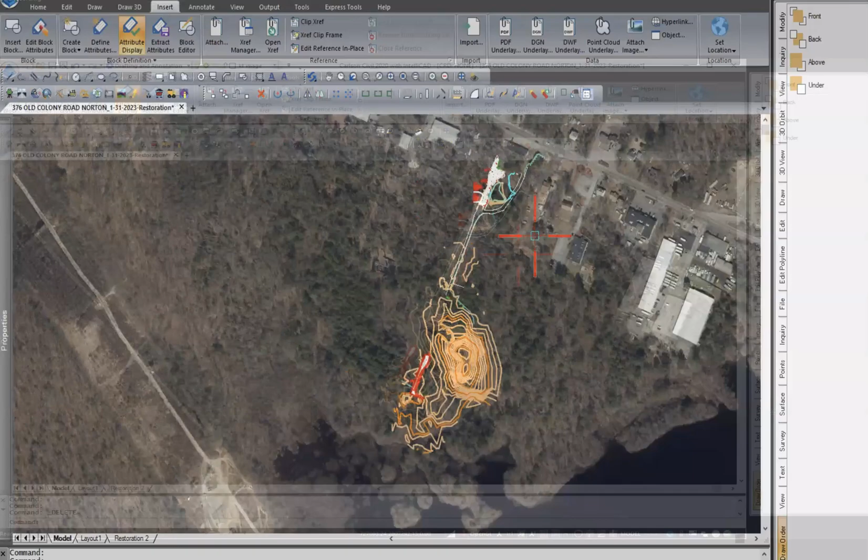Good evening, my name's Ken Thompson. John, can I share the screen? You have screen sharing capabilities, Ken. Can you see the AutoCAD drawing? Not quite yet, it's coming. There you go, okay, it came up.

This is a long linear property that extends from Old Colony Road down to the lake. I'm sorry I don't see my property boundaries up right at the moment, but as part of the enforcement order, which was over 8,000, I'm finding it more like 9,400. There are two major areas of impact up behind the buildings and in the back here as part of the road construction.

I want to zoom in here. We went in and did some soil augers and test pits up in the upper half of it. In the middle of the project, I'm finding 3 feet of muck with 18 to 24 inches of fill on top. It's a good gravel fill.

What we're recommending is to come in from this backside here. If we need to build a road on top of what's already there just to support the equipment, we will, but to remove all this material we're going to truck it off site. We decided to truck it off site and then restore the area by exposing existing muck that's available, then regrading it—hummock and hollows, pit and mound—and then replanting it. I have a planting plan here.

That depicts what you see here, a combination of 4 different trees and shrubs. It's based on Army Corps standards. The trees are set at 10 foot on center, and the shrubs are spread among them.

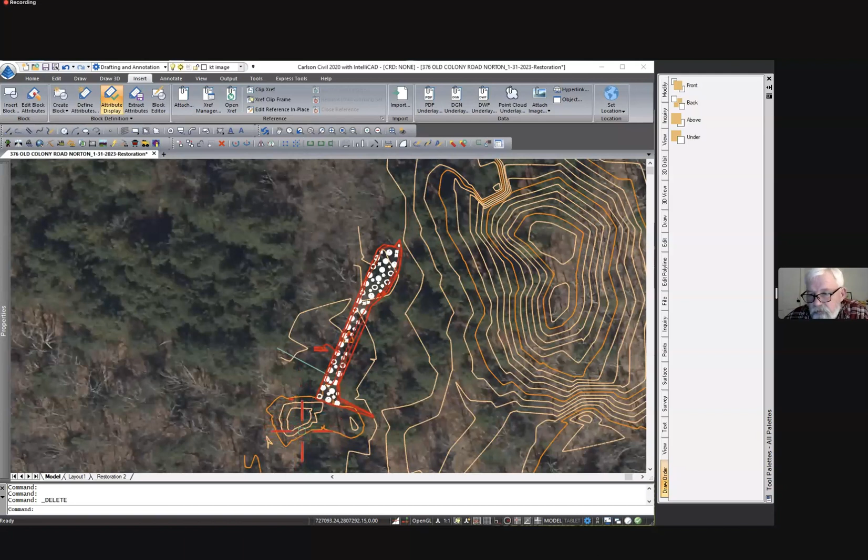Now the rear portion of the property, it's more of a hard case road here. We'll remove that road and backfill it with a compost loam mixture. I'm going to block it from draining into this hole down at the bottom—it was an over-excavated hole, which is now wetlands. The wetlands extend across the road in several areas here. Because I have this image on, you can't see the roadway, but it's basically right here.

Same plan: put the soil back in, and then plant it Army Corps style. There's going to be 2,200 linear feet of silt fence to protect the road and everything.

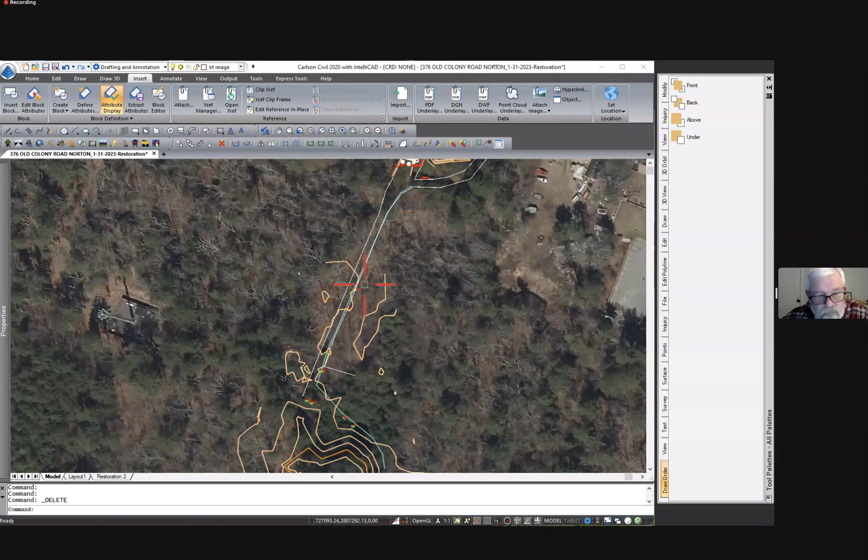To gain access to the rear of the property, there's a culvert right in this section here, up behind the buildings, and then a wet spot back here. So we'll put metal plates over it to get the dump truck over it, and then timber mats in this area. That's for the enforcement order. Are there any questions I can entertain?

And just to John Thomas, I'm assuming this addresses all the components of the violation out there, which dates quite a few years ago, I believe. Yeah, I think this was a lingering enforcement order since the late 80s, early 90s.

Looking at this site, you can tell the gravel road isn't paved, and it had some sort of historic fill there. In order to bring this site into compliance, what's being shown identifies the major areas, mostly associated with the roadway. Based on this, it looks like it would meet or even go beyond the removal and replacement mitigation of what was historically done.

And I'm assuming this has to do with an interest in selling the property? So the property's been purchased by United Excavation and Paving. A family operation - this would be the home of the excavator, not the paving company, another member. So they'd like to utilize it long term, coming back in with a notice of intent to account for the culvert crossing and this little fill down here, which at this point is just a rutted road.

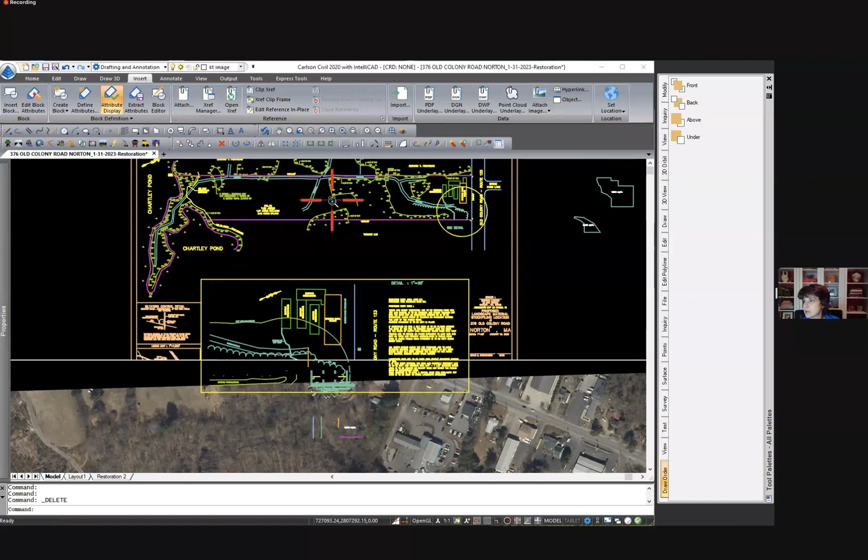That's the wet zone, and there are hummocks and hollows out here, so I'm going to try to incorporate that. It depends on what I get - once I get the stuff off, do I have a big puddle or do I have some material to work with, fluff it up and work with?

Okay, so as part of the sequencing on this plan set, I would ask that it's very clear that they contact you to oversee this work. Well, I can guarantee I'll be there. Okay, yeah, I just want it on the plan. Yeah, that's fine, I understand.

And then, so it doesn't look like - these areas have obviously been filled, so there's no tree clearing required. Is there even for access?

No, it's mainly Russian olive right now and multiflora rose growing through the center section here. There's one area we're going to leave the fill in place, right across here. This is an open water area that John and I think is a vernal pool, and it has saplings growing out of it that we want to keep for shading purposes.

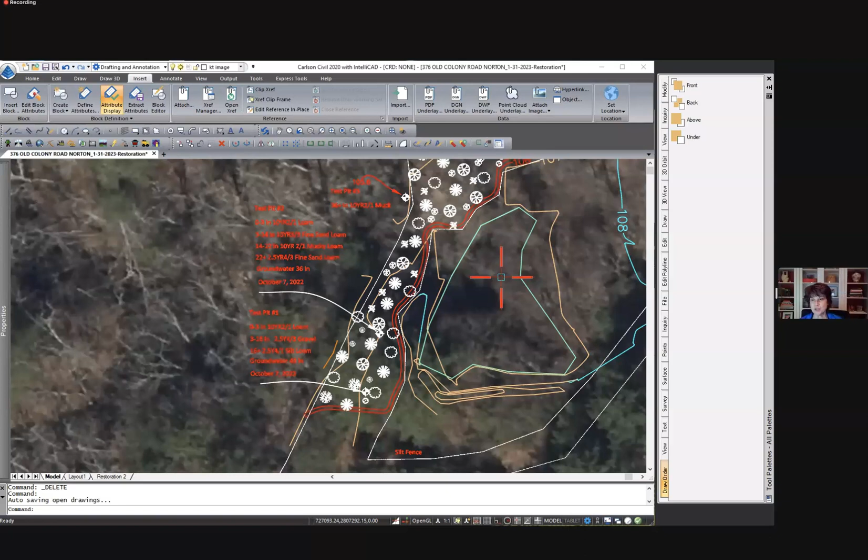Okay, it sounds like you have a really good plan, you just need to articulate it. It's in your head, you just need to articulate it onto the plan, that's all. We'll get it done for you.

Dan, you had a question? Yes, may I make a comment? Is the multiflora rose to remain? Because that's invasive. I should come clean because it's been growing on my property too, and I have to get rid of it again this spring. It smells nice and looks nice, but it is an aggressive invasive plant, as you probably know.

So we would hope that you would get rid of it. We're gonna get rid of it. And you can borrow my tree wrench in the spring. How's that sound? Okay, that sounds good.

I use a scythe, but okay, that sounds good. Tree wrench, you get the roots. Oh, well, they sell them at Home Depot. No, I had to order it online, but you can borrow mine. It's too much money.

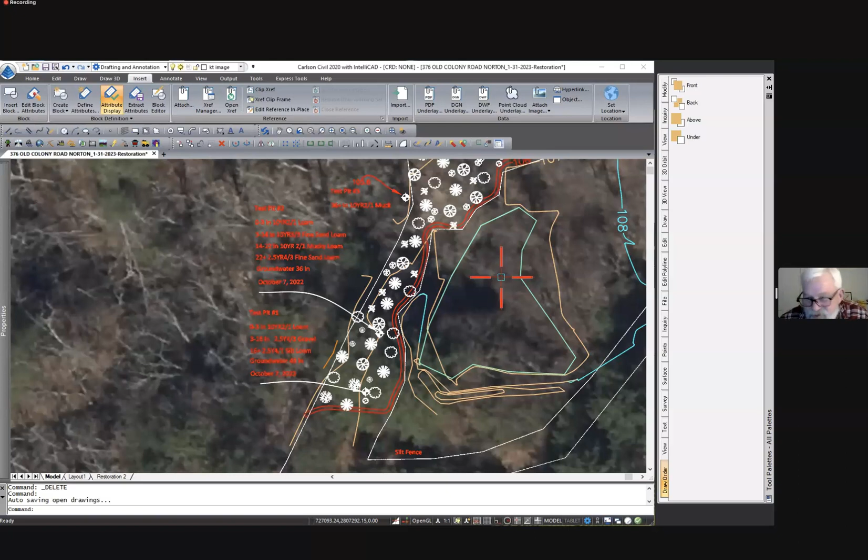Thank you, no worries. Yeah, and there's Russian olive out there that's also invasive. Any invasives in the area, I'm going to pull and get them out of the way. I won't promise on purple loosestrife. We can try it if you want, we can do it with chemicals, but the idea is to get as much as possible in the first round, and then we'll deal with that afterwards. Yeah, thank you.

All right, any further questions? If there aren't, then it sounds like we need to continue this for submission of the specified requested additional information. But this is pretty straightforward. You're just removing stuff in a cleared area, and then you'll be replacing it with appropriate wetland soils. So very straightforward.

No further questions? Ken, you have no problem with continuing till... No sir, I'll get you the plans in the interim, so our next meeting is the 13th of March. And with regard to removal and then waiting till spring, I think spring is going to be here pretty soon, the way this weather has been. Yeah, my tulips are coming up in the yard.

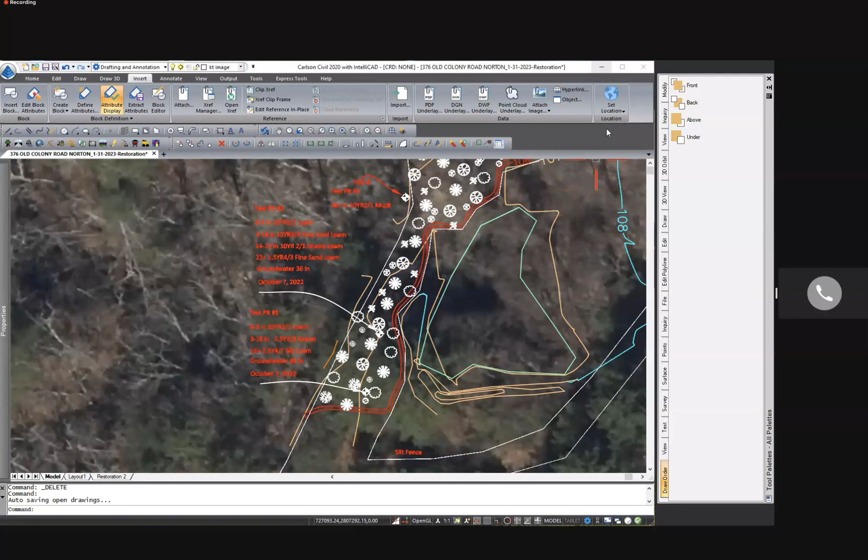Our next item is in continued public hearings. It is file number 250-11130 East Hodges Street, notice of intent, and it looks like they requested a continuance until March 13th. Looking for a motion.

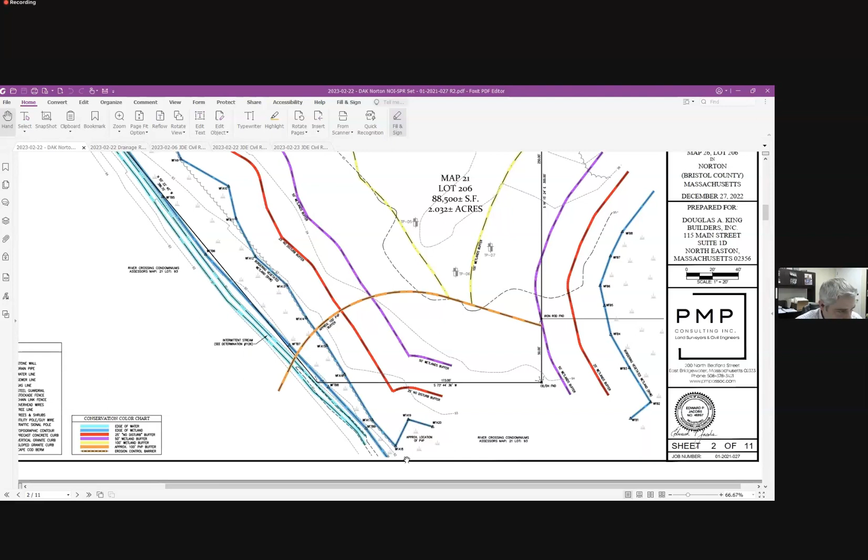So the way we left it last time, right before I submitted the plan set, I got feedback from Brad Holmes, the botanist, and John. They went out and met on site, walked the line, and identified this area between wetland flags 18 and A18 and A20 as proximate potential vernal pool.

So I've since added that onto the plan, and a buffer, 100-foot buffer to it.

That being said, I went ahead and revised the stormwater basin. Previously the stormwater basin came back into here a little bit more, and I was able to pull the grading and everything back of the stormwater basin. So the whole top of the berm and the basin itself are outside of the 100 feet to the potential vernal pool. Still works fine, still holds all of the volume runoff.

We don't have an outlet control structure on either of these basins. Everything gets infiltrated. We do have an emergency spillway and a pipe for drawdown for maintenance of the basin if needed.

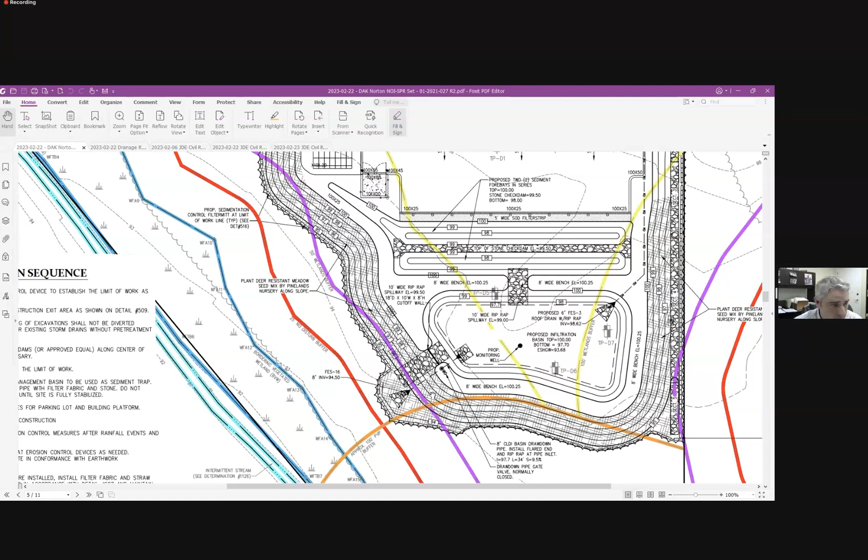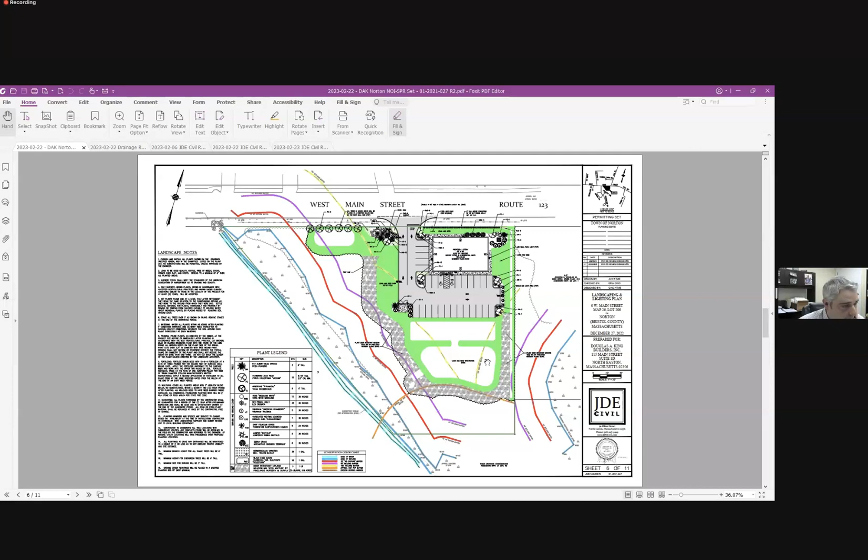And I can go through some of the stuff from the review letters, I think the last one. If you just want to go over the last couple comments from the most recent letter that HW sent over, I think that should be sufficient. Okay.

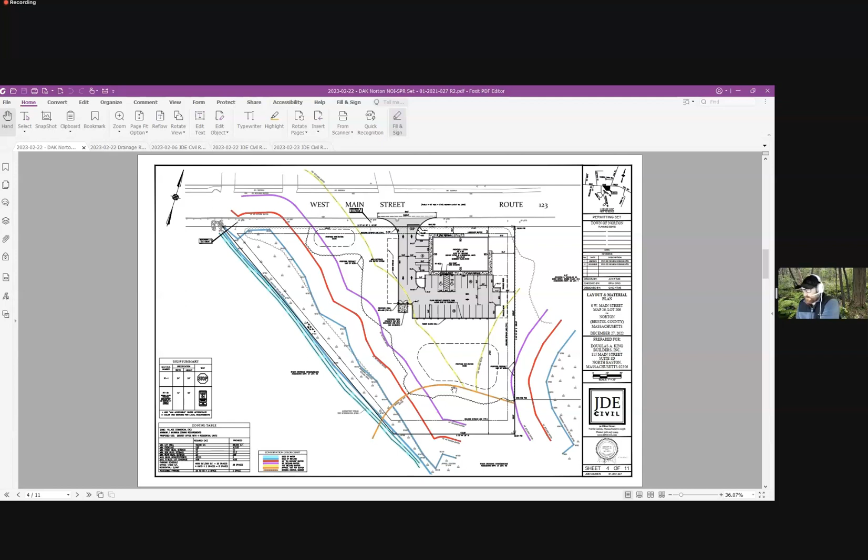One of their comments was regarding the riprap sizing calculations. We provided those calculations in the drainage report, and they wanted me to update this detail to show the dimensions and everything that are in that calculation. So that's on that detail sheet right there.

Another thing we went back and forth on is the calculation of phosphorus removal, which we're in agreement on, right John? Yes, that is correct.

And let's see, comment number 9. Want me to revise the operation maintenance plan?

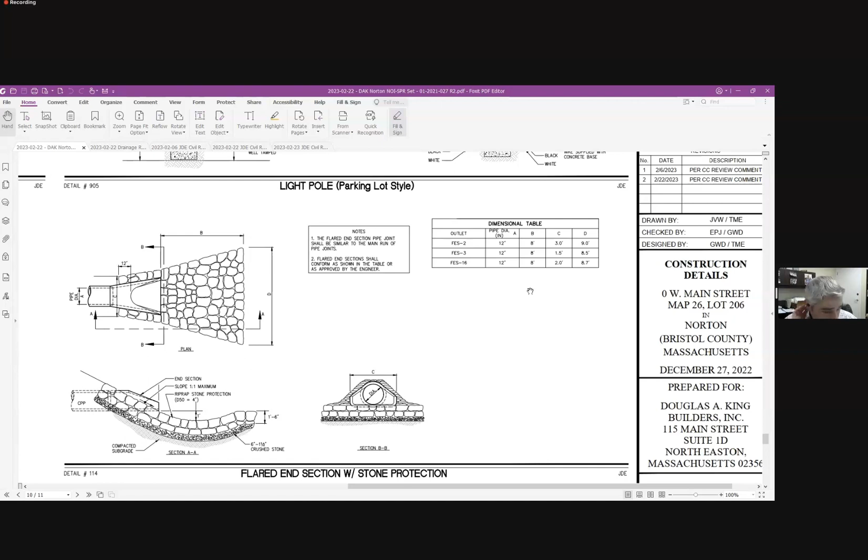So this one was, they wanted me to revise the operation maintenance plan to have the catch basins inspected quarterly. And I had missed that on sheet 5 of the plan set. And I did revise that as well.

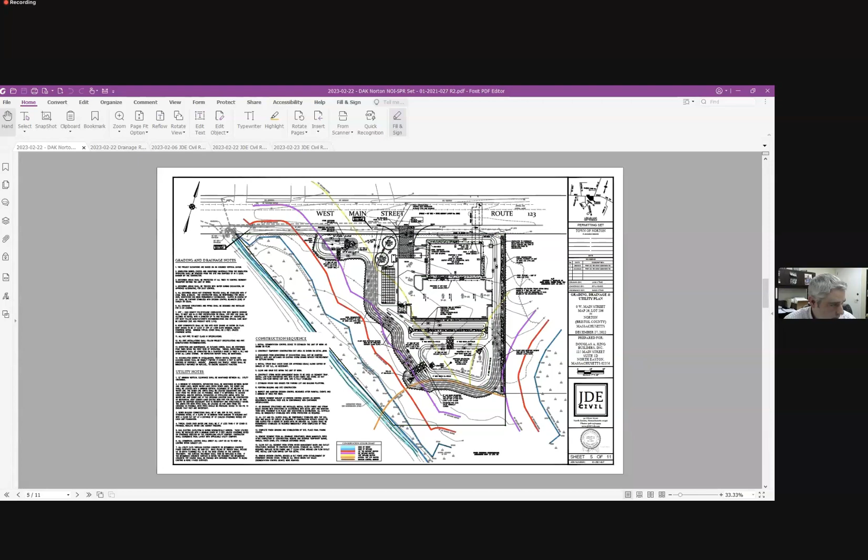It's in these notes here about the inspection, so it matches the O&M plan document that we had.

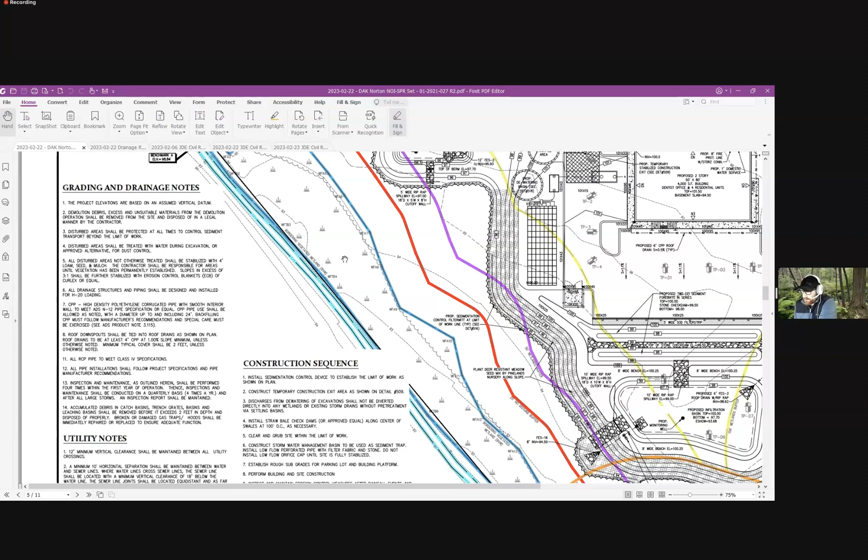And then from Ursula Winton's letter, if you want, I don't know if you want to go over, John, or I can, the recommendations for special conditions. Yeah, they had some recommendations in there for the conditions pending the issuance of an order of conditions.

My recommendation is that the commission have those conditions in any order of conditions that would be issued for this project. So there might all be questions, but all in all, I'd say that JDE Civil has met the 10 standards that are required.

Obviously, there may be some minor tweaks and plan revisions that may need to be made, but I feel that, at this time, we can definitely have that information secured pending either the next meeting, if the commission decides to close this meeting tonight.

Also, it is a general condition that I usually put in an order that they provide an updated OMP before any pre-construction meeting, and we'll have that signed by the owner at the time before construction begins.

I think the plan with this property is for Mr. King to get this approved through conservation and planning, and then I believe he's going to sell the property to the dentist's practice that will then go ahead and build it. So we can update the O&M plans and who the responsible party is and all those names and stuff in the future, before that gets, you know, we have to provide a copy of this.

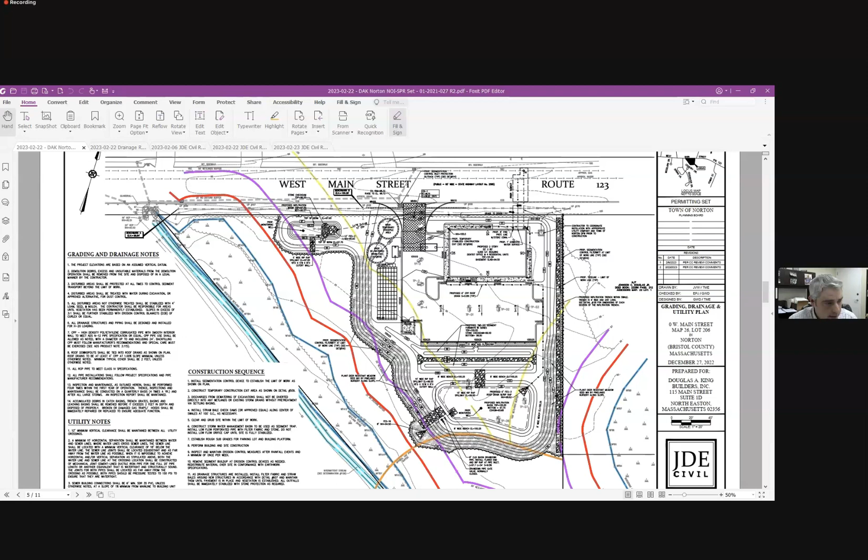But yeah, as far as plan changes, I think we're good. We will be going to planning board on, I think, the 14th. So we already have that submitted, and whatever might come out of that, we can address.

All right, so any further questions from the commission or anyone else for that matter?

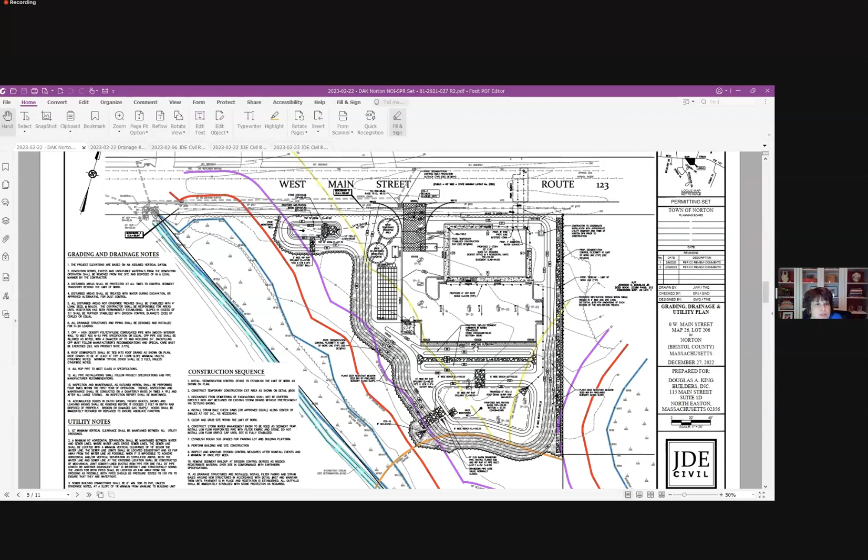Greg, I think, if I remember this correctly, I had asked you about the location of that small infiltration basin along West Main Street, if you could possibly reorient that so that it's outside of, I mean, if you turn it 45 degrees, is there any reason why it's oriented the way it is? Because it's intruding closer to the 25 foot.

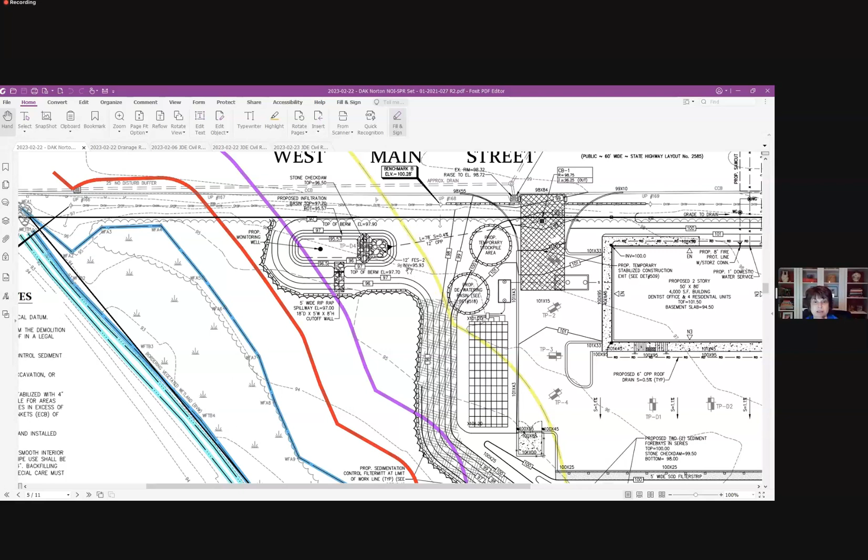Yeah, there is, and it is the distance from the septic system. Okay, yeah, all right. Thanks for reminding me. Yep, no problem.

All right, from what I heard then, it seems that sufficient information has been submitted that we can consider closing, and then the additional information will be provided before the next meeting when we would consider an order of conditions. Did I get that right, John?

Well, I don't think anything needs to be submitted as of right now. I'm saying the commission can close the meeting this evening if they choose to do so. And then prior to any pre-construction, it's going to be in the conditions that they provide an updated O&M and any construction detail plans. So does the commission want to carry this project any longer, or should we close it?

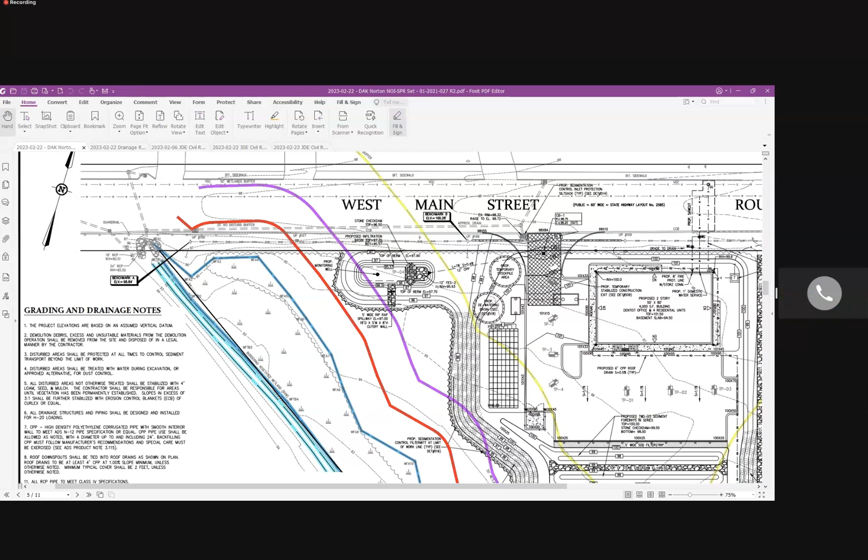I'll make a motion to close the public hearing for 250-1122. Second. We have a motion made by Lisa and seconded by Dan to close a public hearing for file number 250-1122. Roll call vote beginning with Mark and Lisa, aye, aye. And Ron and Dan, aye. And I'll throw in an aye, so the motion carries.

We'll be working on an order of conditions next meeting. So between now and the next meeting, the order will be drafted? Yeah, so what's going to happen is I'm going to draft up an order. I'll probably send you over a draft, just giving you an idea what's going to be in that order, so if you have any questions you can reach out to me. And if everything's good, do I need to be at that next meeting? If you are confident and comfortable with everything, you do not need to be at the next meeting.